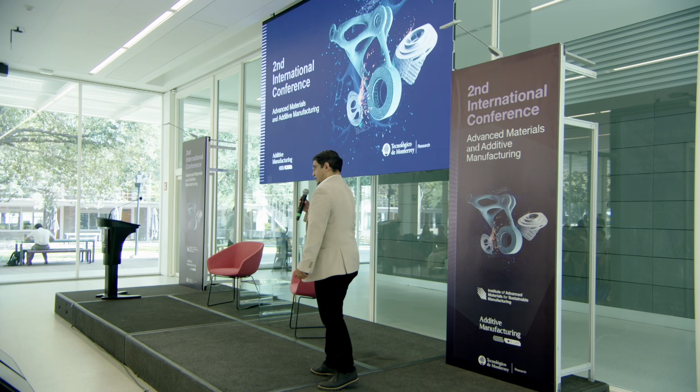Thank you very much, Dr. Chairez. Thank you. Well, thanks again for being here. I will present another area that we are developing in the research unit where I am participating, related to different applications of additive manufacturing together with robotics.

Here we want to bring these solutions to solve one of the biggest problems that we have, especially in Latin America, about civil engineering safeness for workers, for masons. Masonry is the profession producing mostly the persons affected in the spinal cord because of injuries, because they fell down and could suffer accidents.

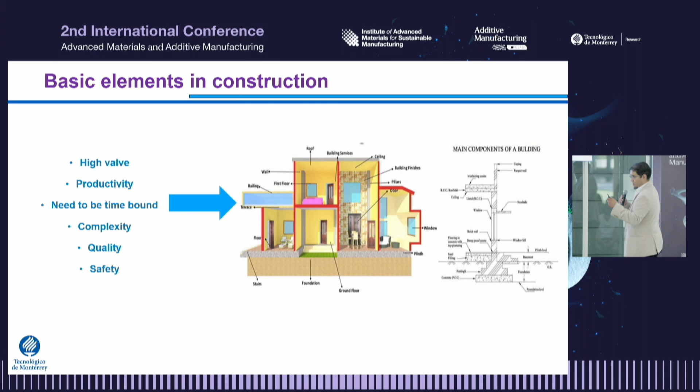For many years, construction has been considered one of the most reliable, effective, and affordable industries all over the world. It has to provide high value, productivity. It has a lot of requirements related to the time you need to accomplish, complexity, quality, and so on.

The current complexity in civil engineering is bringing new aspects related not only to the advances we have, but also to the problems we need to face. For example, the decline in productivity, the low quality of final constructions if the rules and norms are not followed, the time overruns, and the vanishing skilled labor force, which is a real problem all over the world. Finding good masons and architects who could work in producing good enough constructions is a mess.

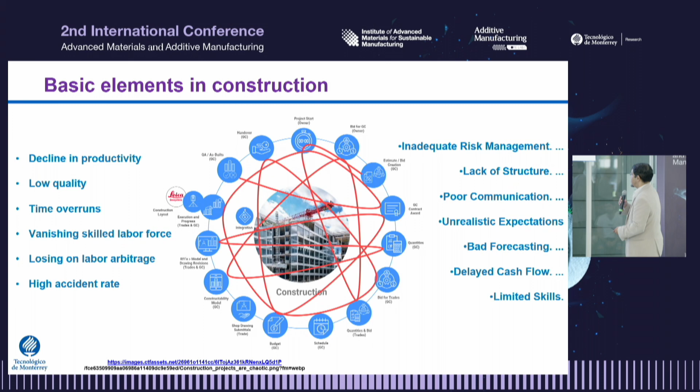And especially in zones that could be sensible to earthquakes and other possible problems around civil construction, this has motivated new areas to be explored in the near future, especially considering that civil engineering is using materials considered among the most contaminant in the world, like cement production, casting industry, and so on.

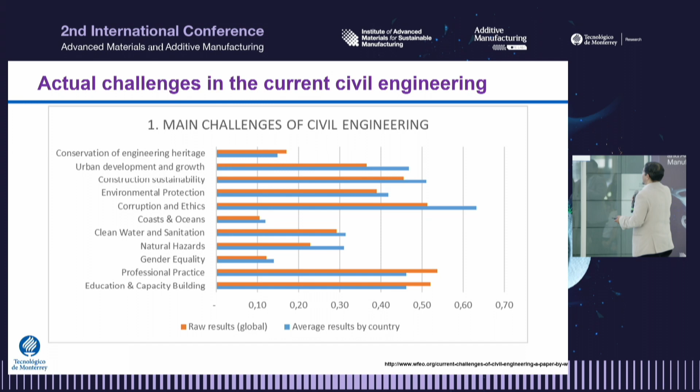If we look at the main challenges of civil engineering recognized by specialized organizations, we can see that sustainability, environmental protection, and professional practice are the main ones that should be faced in the near future.

And what are the proposals up to now to face these challenges? Of course, creating sustainable communities, balancing sustainability with profits, which is quite important, and designing for future transport needs. Maybe one of the most important ones is rebuilding the existing infrastructure, considering what we are doing for helping workers in this area.

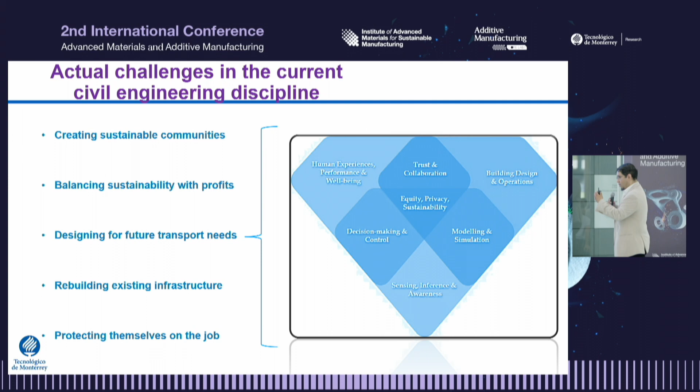In particular, if we consider the Sustainable Development Goals proposed by national and worldwide units, it's related to engineering for sustainable development.

Automation in the construction industry could offer, for sure, a good and reliable way to increase productivity, transform collaboration with other sectors in industry and science, and especially think about the safeness, the safety and well-being of workers.

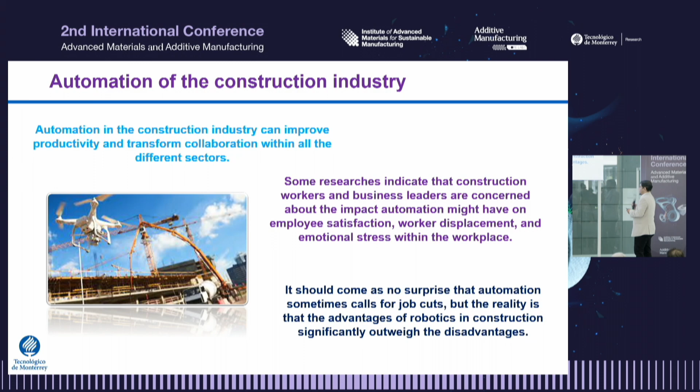This is one of the things we are very worried about, especially because beyond the necessity of elevating productivity, we need to attract highly skilled talent to accomplish the production of these civil structures on time.

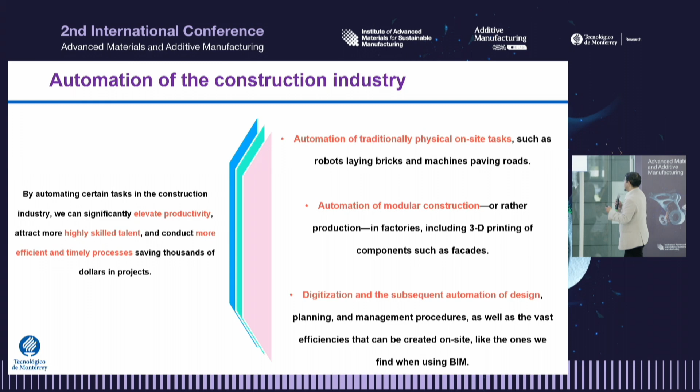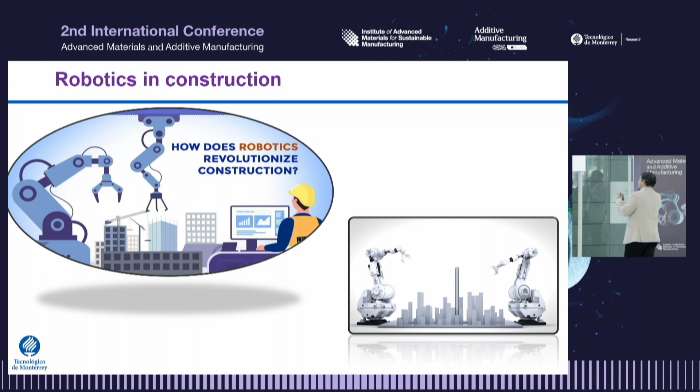All of these are the key goals we can attain with automation, not only thinking about producing new blocks or new ways of bringing robotics into industry, but also creating modular construction that can accelerate how we get the final design or final product of civil engineering. This is the reason for this talk: how to understand how with robotics we can revolutionize construction.

What we are thinking is that robotics is the intersection of many disciplines, engineering, technology that could produce machines, and that could replicate, collaborate, or in some examples, substitute human actions.

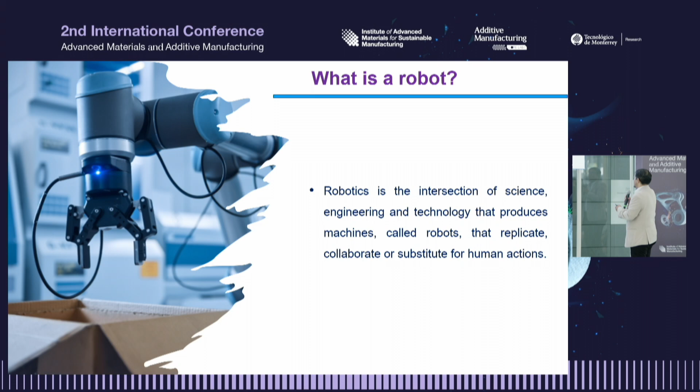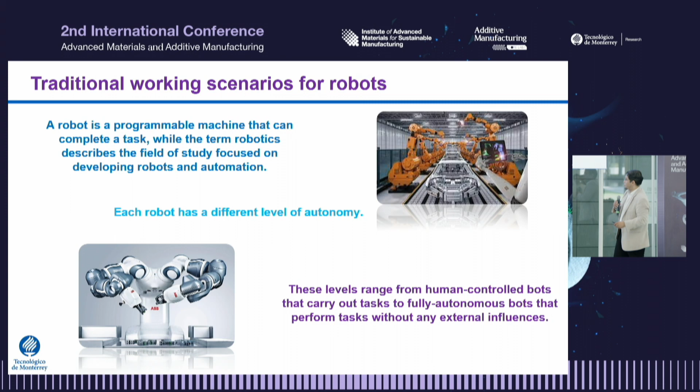Traditionally we understand robotics in industry like these kinds of things, working on specific areas, controlling the scenarios, very well-known environments. We have these traditional industrial robotics, or this kind of advanced collaborative robots.

But if we take the robots out of the controlled scenario, things change a lot. Exposing robots to the real environment, working in outdoor scenarios, implies a lot of challenges that we need to face when developing robots.

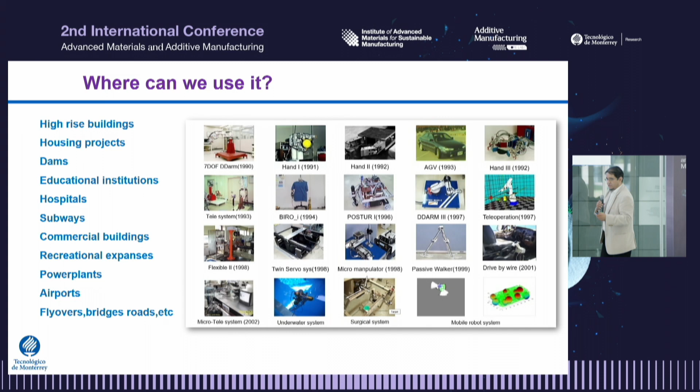Because we understand that we can use robots for a lot of things, all the additive manufacturing systems are actually a kind of robotic device at the end. And if we now understand that robots are everywhere, in every area in industry...

Why not bring these robotic solutions to construction? First, we understand that construction is still today one of the most labor-intensive industries in the world. I think it's incomparable with respect to many other industries.

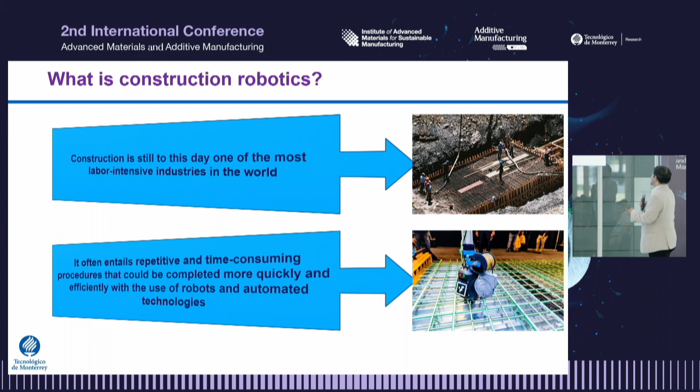Also, we need to understand that it is quite time-consuming to produce very big civil structures, and it will demand a lot of persons working in very unpleasant conditions, producing roads, civil constructions in very high temperatures, exposed to the environment. So it's not good for these workers.

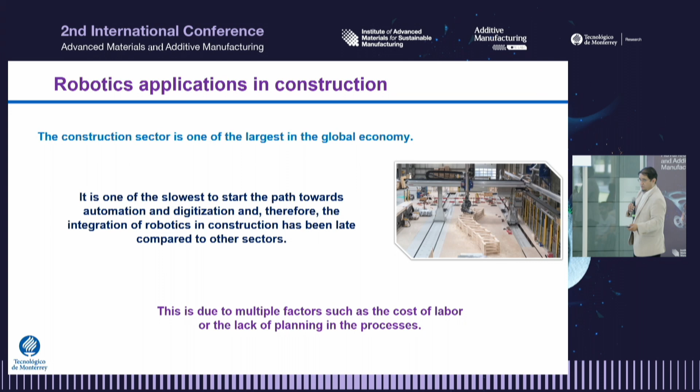And that's why, since maybe 10 years ago, there's been a kind of industry transformation, bringing these kinds of big robots to make prefabricated structures that can be transported from the design and construction center to the real environment, to put a prefabricated house by a 3D printing system based on this kind of technology in real social areas.

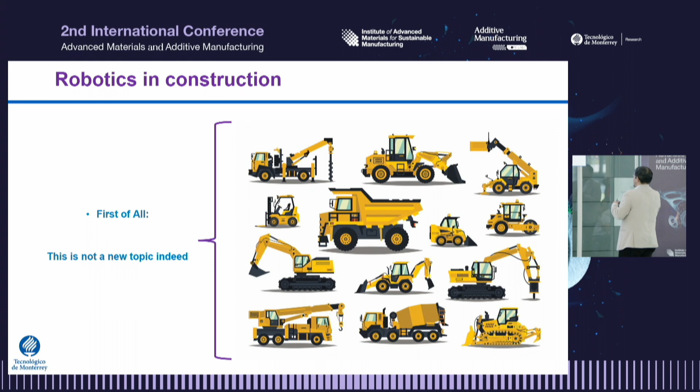However, if we go back a little bit, we understand that robotics in construction is actually not a new thing. All these machines are indeed robots. But the way that we want to apply robotics in construction is quite different. It's not like that, but something that looks like this.

To automatize wall construction, to use robotics to construct devices in open environments, and to have the chance to collaborate with masons, thinking about the social impact that this could have on masonries.

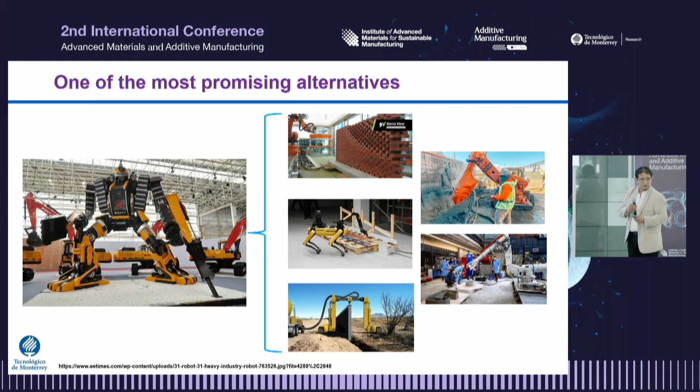But if you look at these big robots, one thing is passing in your brain: cost. How costly this could be for companies here in Mexico and in Latin America.

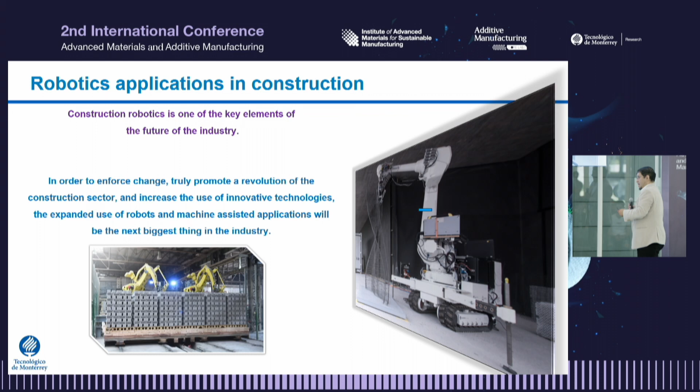Now this is not a new trend. It's something that is happening all the time in new construction industries that are taking advantage of what we can do with mobile manipulators, with collaborative robots, and this is automatizing what happens in industries all over the world.

When we consider the requirements for developing these new robots for civil engineering, we need to consider a lot of things. First, big robots that can handle different weights, different torques. We need more reliable instrumentation that could work outdoors. And we need new control techniques to regulate how the robot is moving in very changing conditions.

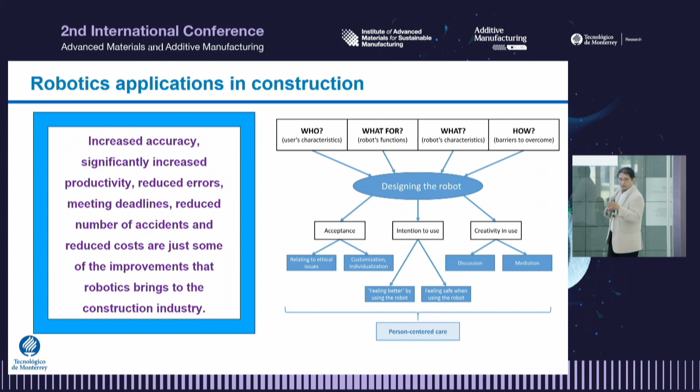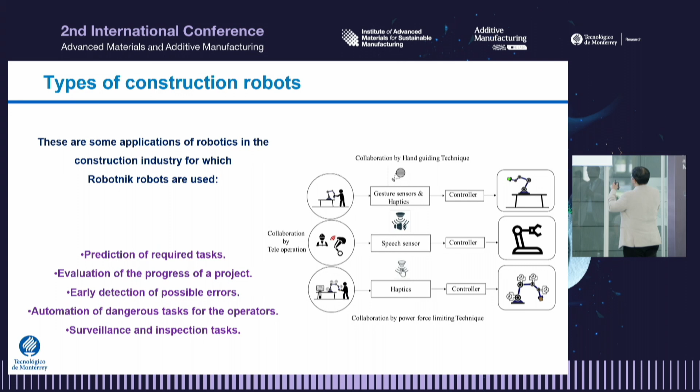So based on that, we started analyzing what could be the areas where we can propose new things, bringing together machine learning tools, more advanced sensing systems, predicting potential errors, analyzing the effect of failures that we can have in the robotic device, and preventing the operation of this robot.

And we considered that we can have two potential areas where we can implement what we know. The second one at the bottom tries to bring the robotic device to construct this kind of civil structures like houses, but that cannot be applied here in Mexico, especially in the south, because of the earthquake conditions. Actually, the current regulations here in Mexico don't allow constructing this kind of structures.

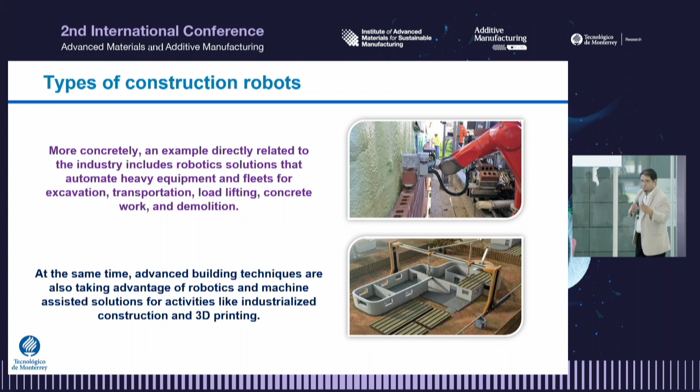But we all know that kind of construction in Mexico: bricks together with mortar in the middle, and then to start working with the robots. Doing that could be, let's say, more realistic for the kind of problems that we are facing here in Mexico.

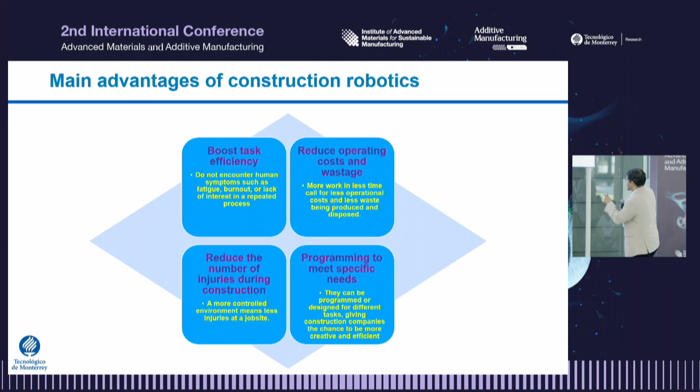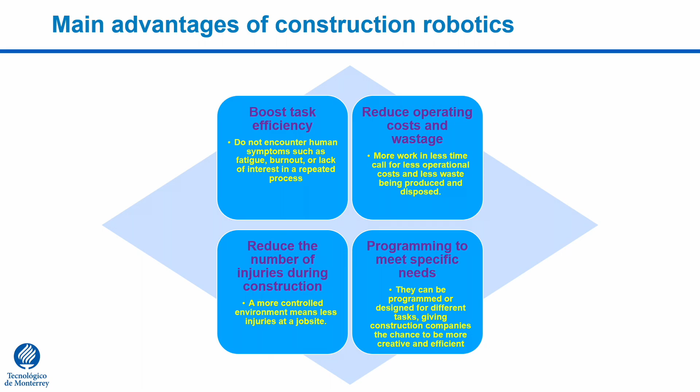So thinking on the necessity to boost task efficiency and reduce operating cost, as well as reduce the number of injuries, which is one of the most important aspects we are trying to solve, we analyzed a lot of examples of civil robots, or what they now call civil robots, working all over the world.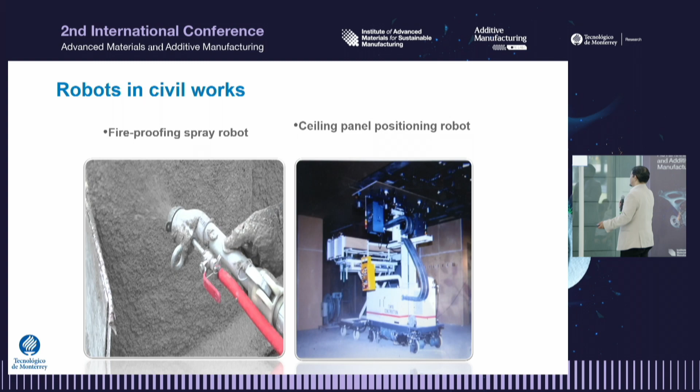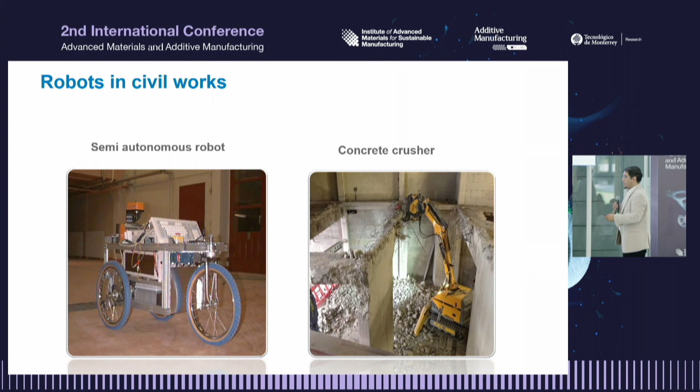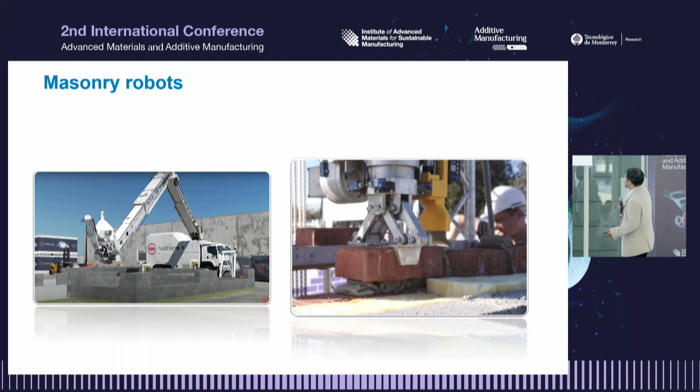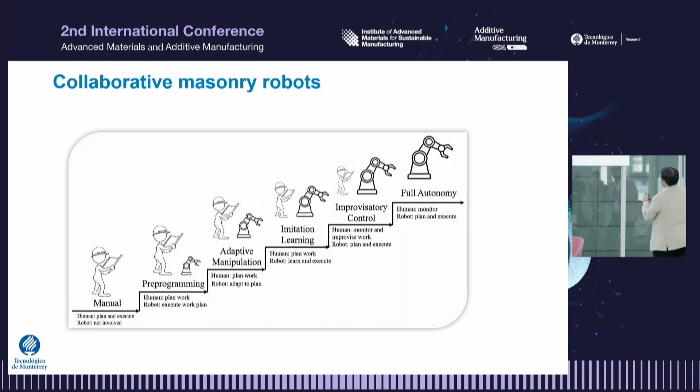We analyzed a lot of these kind of applications for demolishing, for carrying bricks, for doing a lot of stuff that are common in civil construction. Based on this analysis that we did about two years ago, we found an interesting possibility of bringing this process that we know for the basic manual operation in civil construction to try to develop a full autonomy civil engineering robotic aid process.

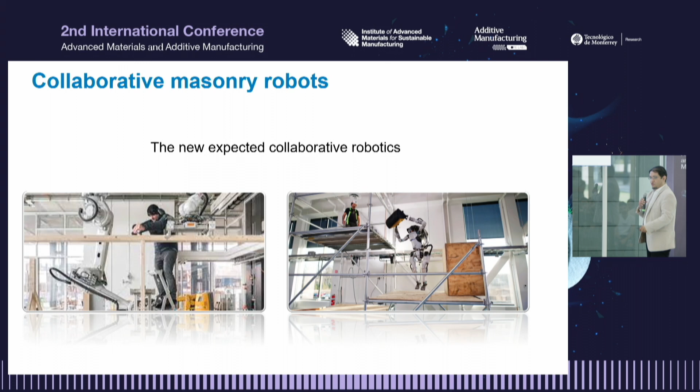Now the trend is to collaborate, to provide an environment where humans and robots could collaborate in civil engineering, with more challenging conditions for the designers of these robots, because it should work under very challenging conditions with these civil structures, but be smooth enough to work together with humans. This leads to our approach for robotics in construction.

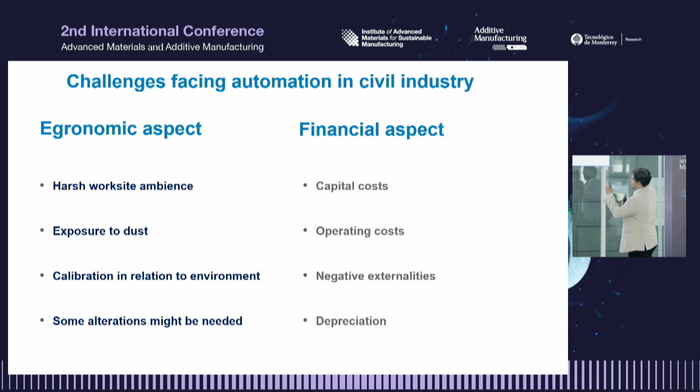We started understanding ergonomic aspects, financial aspects, and fortunately there was a seed funding project that we won together with the University of Alberta, with my colleague Yu Xianshen, and we started constructing this idea of bringing robotics in construction as a joint project.

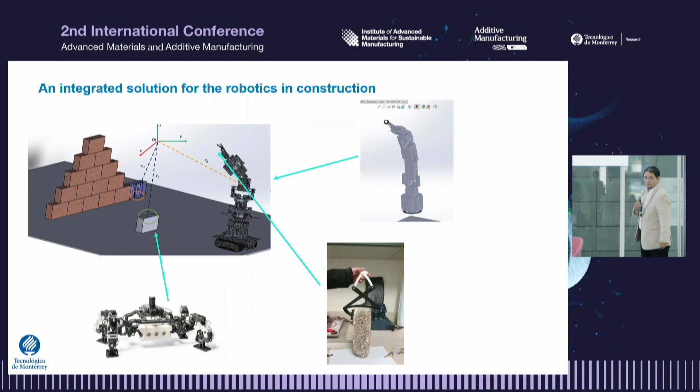Thinking in this concept, we created the entire pathway to construct a mobile manipulator that can handle bricks automatically, to put them on the wall, aided by this brick carrier robot that we are developing in Guadalajara. All these systems are in Guadalajara, with new solutions for simplifying how to handle the bricks together.

We developed a twin, a real robotic twin. There is one in Alberta, and there is one here in Guadalajara. We are working with both together, just to replicate what we can do on both sides.

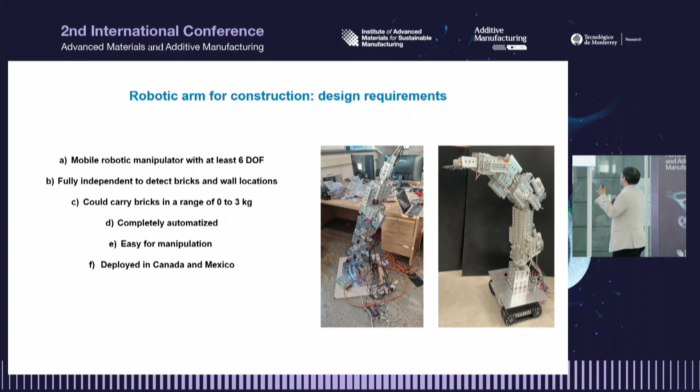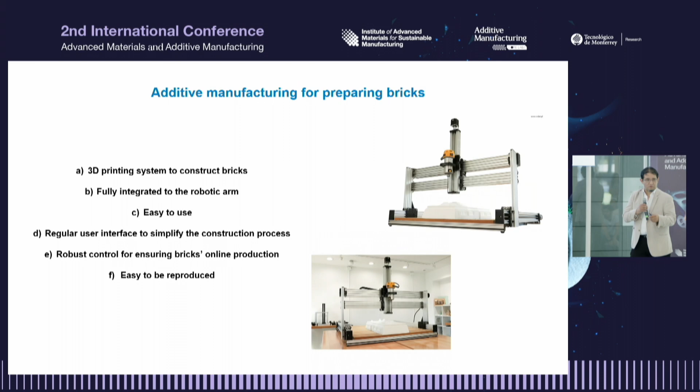We are constructing everything - the metal mechanic part, the instrumentation, control, and artificial intelligence elements. We also constructed the 3D printing system for making bricks automatically, and together with a colleague in Mexico City, we developed that automatic gripper for handling bricks.

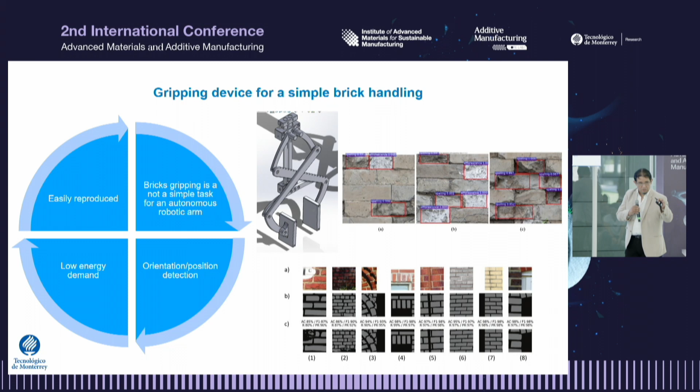The idea is to take advantage of gravity to reduce the load that we need to apply to the robotic arm. Then, with an artificial intelligence tool, we started to detect the bricks in a wall to find the correct position for the new bricks that should be inserted.

As I said, we made a new development of a control algorithm that considers a hybrid position-force scheme, because when the robot is moving it should not worry about the load, but when it has to carry the brick, the control action should change in order to handle the brick correctly.

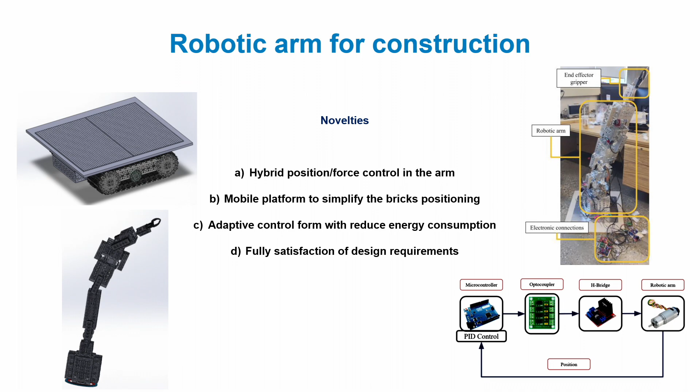We developed the mobile platform and adaptive control to reduce the energy that we are using in the robotic arm, and of course full satisfaction of the design requirements that we proposed.

This is the robot. There is a video just showing how this small robot, made of aluminum, could carry about 3 kilograms.

This is one of the first tests that we made using a kind of very simple crane that can work together in an open environment.

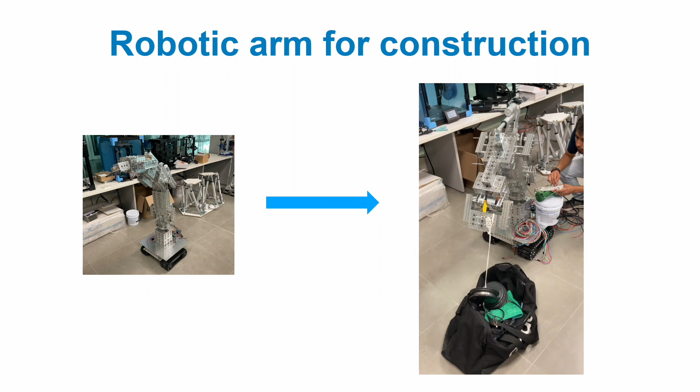We tested this outside, and this is the additive manufacturing system that we have for deploying clay - up to now clay, but we are working on the mixing process that we will try to develop together with Dr. Trevino, using a couple of continuous pumps to deploy the material with this 3D printing system.

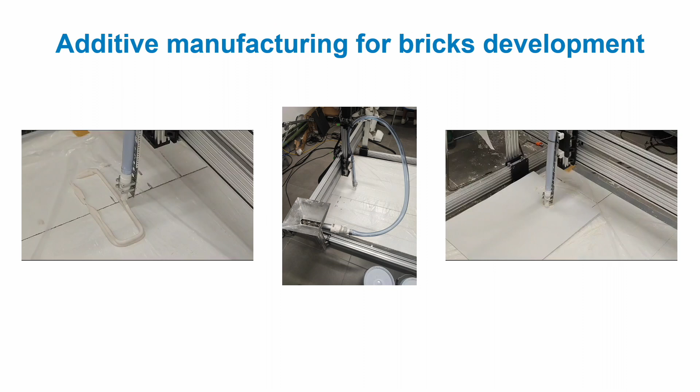Just to save some time, I will move to the next part.

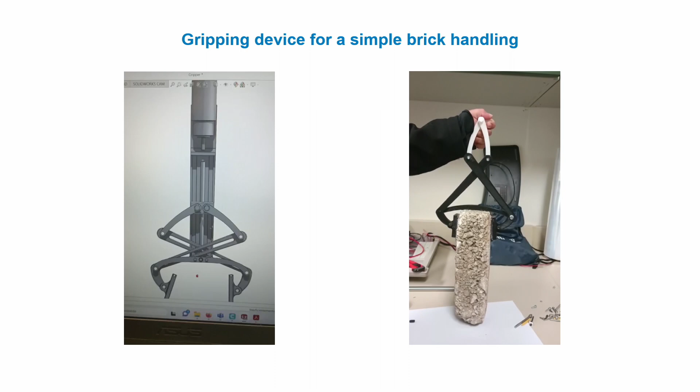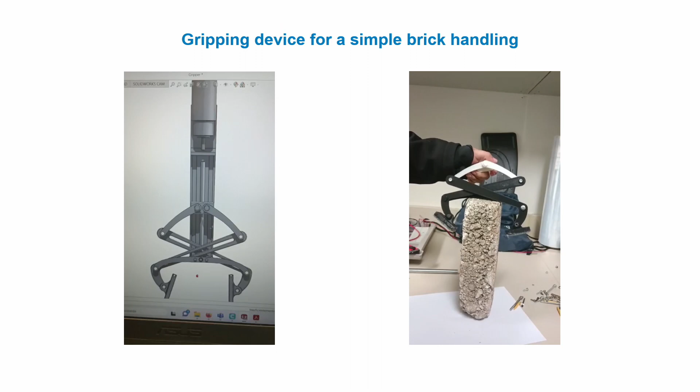This is the kind of gripper that we are developing now. This doesn't actually need a motor over there, because that part will be more exposed to environmental conditions, so we need to avoid as much instrumentation as we can there.

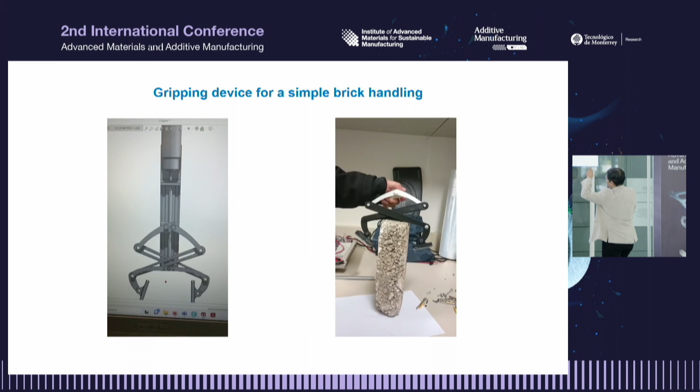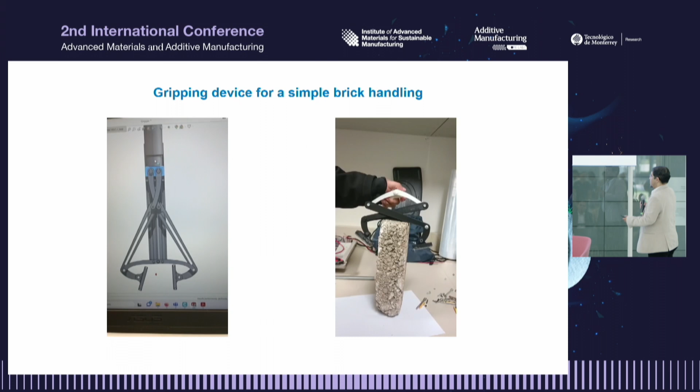What we found is that we can put the same type of gripper together with a linear actuator to carry the brick in a simpler way compared to what we have now in the robotic arm. Now we are working on that device that can carry the bricks automatically.

So together, we can produce the bricks with the printer, carry the bricks with this device, and put the bricks on the wall automatically.

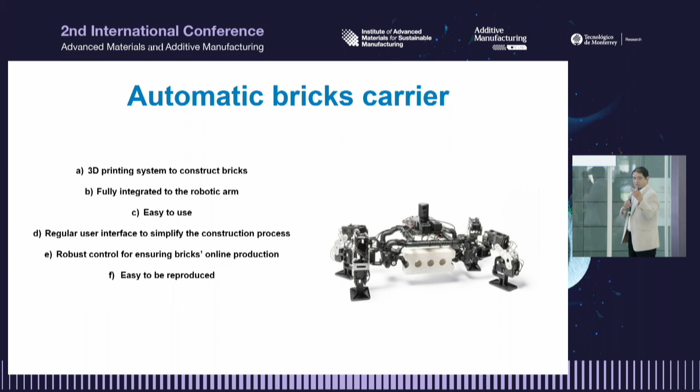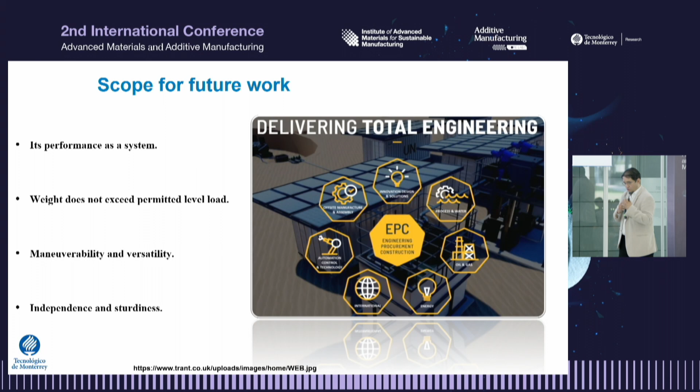Everything controlled in a cyber-physical system design. What we are expecting is to have this integrated cyber-physical system ready to be exposed to the industry, maybe next semester, because we are working in the three areas together. I hope that we will invite you to see it working, all the robots together that are not needing external cameras and nothing else. They are working in a coordinated manner using a multi-agent strategy based on online optimization control algorithms. So this is more or less what I want to present about what we did in this area of robotics for civil engineering. Thanks a lot.